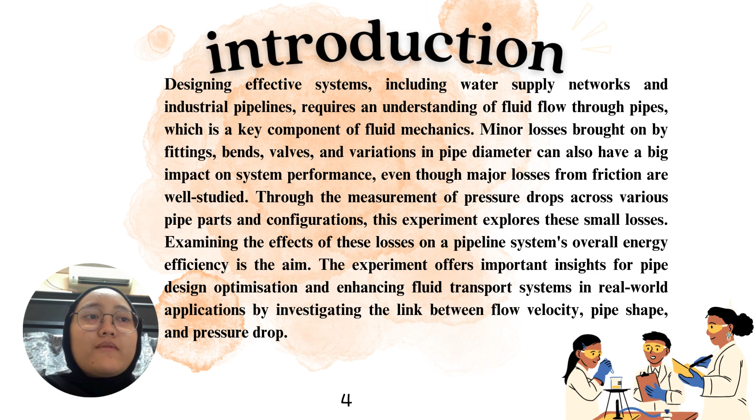Through the measurement of pressure drops across various pipe parts and configurations, this experiment explored these small losses. Examining the effects of these losses on the pipeline system's overall energy efficiency is the aim. The experiment offers important insights for pipe design optimization and enhancing fluid transport systems in real-world applications by investigating the link between flow velocity, pipe shape, and pressure drop.

Therefore, the objective of this experiment is to determine the loss coefficient KL value and minor head loss HLM in pipe components or fittings for different water flow rates, pipe diameters, and pipe bends.

The flow in the piping system at different flow rates may be required to pass through a variety of fittings, bends, or abrupt changes in area. Additional head loss called minor head loss is encountered primarily as a result of flow separation.

By simplifying the Bernoulli equation between 2 points of the horizontal pipe, Z1 and Z2, the pressure loss and the total head loss could be determined as follows.

So equation 1 is the Bernoulli equation, and since Z1 equals Z2, we simplify it. Equation 2 is the equation for the total losses, total head loss.

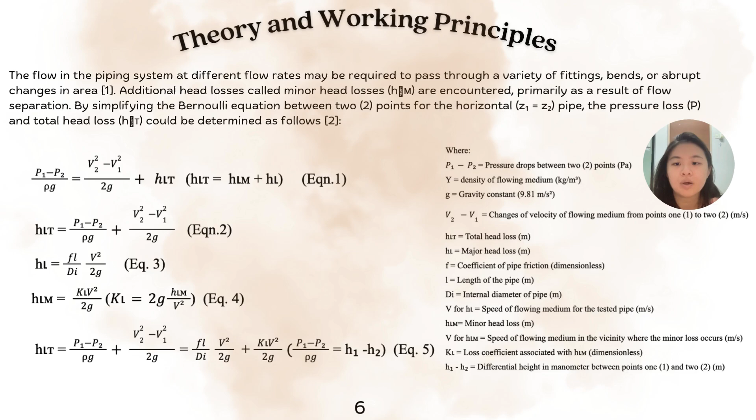Equation 3 is the head loss, equation 4 is the minor loss, and equation 5 is used to calculate the total loss, which combines equation 3 and 4 to get equation 5. So it depends on the equation.

Looking at equation 4, the value of minor losses is strongly dependent on the value of KL. How we determine the value of KL is strongly dependent on the geometry of the component.

In many practical applications, the Reynolds number is large enough so that the flow through the component is dominated by inertial effects, leaving the viscous effect as secondary importance in a flow dominated by inertial effects.

It is usually found that the pressure drop and head loss correlate directly with the dynamic pressure. Therefore, the friction factor for very large Reynolds number in fully developed pipe flow is independent of the Reynolds number.

The same condition is found to be true for flow through pipe components. Thus, in most practical cases, the KL for components is a function of geometry only.

In this experiment, the KL value and HLM in pipes for different water flow rates, pipe diameters, and pipe bends will be determined. The description related to each of the test geometries is as follows.

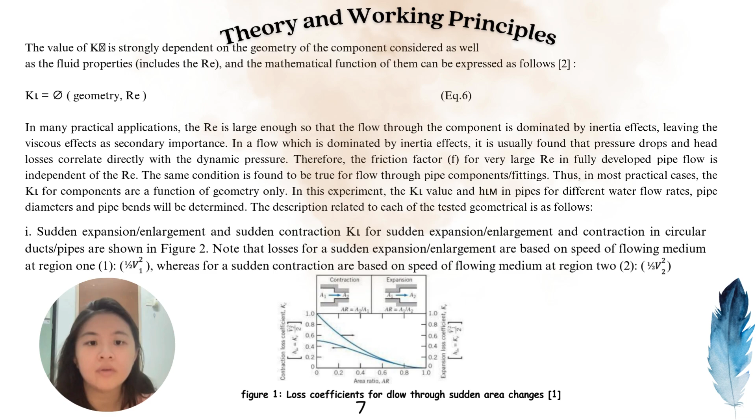Part 1 showing the sudden expansion and sudden contraction KL. You can refer to figure 1.

The value of KL for fluid flow through sudden enlargement and contraction can be obtained by considering the continuity equation 7, momentum equation 8, and energy equation between point 1 and 2.

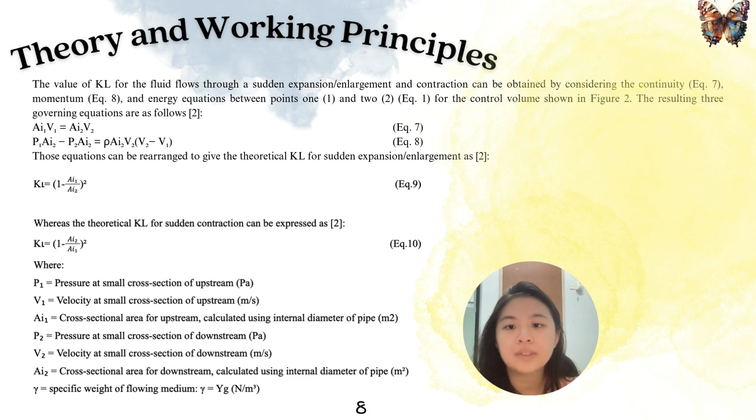Here are the resulting equations 7, 8, and 9. Basically, if we want to calculate the theoretical KL for sudden expansion and contraction, we are going to use equations 9 and 10.

For the second part, we have elbow, pipe bends, and pipe branch. For figure 2, we can directly refer to it to determine the typical value for

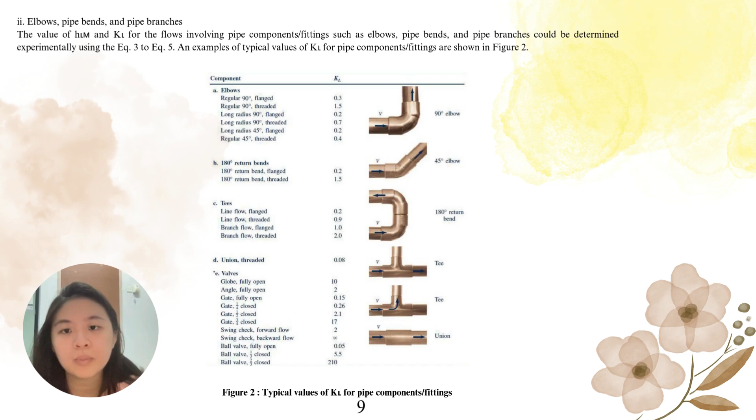KL for pipe components. What we use in this experiment is 90-degree bend, 90-degree angle elbow, and also 45-degree, and also T-type and Y-type branch. We can determine this using the diagram.

For the experiment setup, we have inlet valve, main switch, manometer tube, connected tube, and outlet valve. At the manometer tube, we have determined H1 and H2, and for the pipe selection, we have highlighted the parts of the sudden enlargement, sudden contraction, Y-type, T-type, angle 90 degree, bend 90 degree, and angle 45 degree.

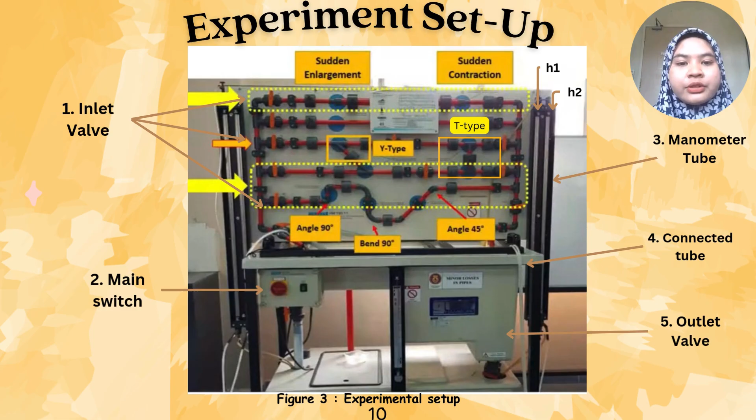For methodology, first the main switch and pump were turned on. Then valve V1 and V11 were fully opened in the pipe section for sudden enlargement and sudden contraction.

Then the control valve was slowly opened, turned counterclockwise to the maximum position, and we waited a while to remove any bubbles in the flowing pipe. Then the inlet flowing pressure H1 and outlet flowing pressure H2 were identified, and the manometer tube was connected.

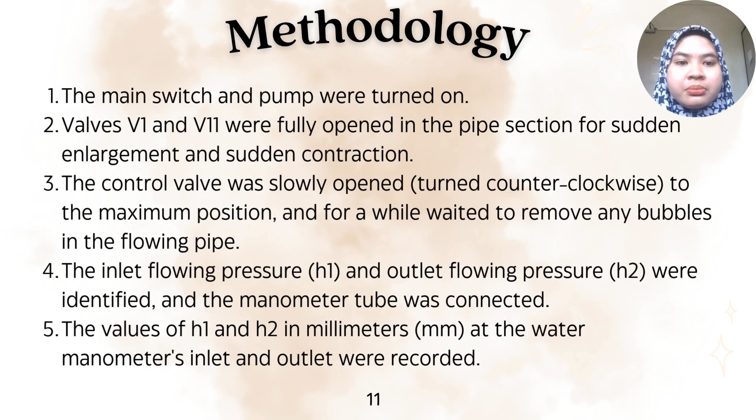The values of H1 and H2 in millimeters at the water manometer's inlet and outlet were recorded. Step 6: the knife valve was closed to collect 3 liters of water in the tank, and the time needed to measure the water flow rate Q was recorded.

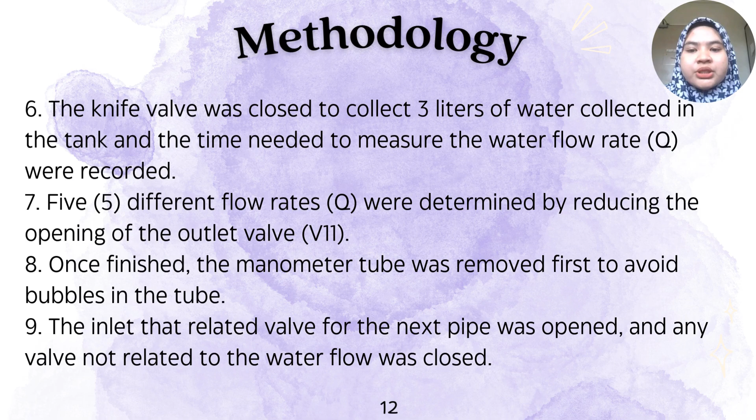Step 7: five different flow rates Q were determined by reducing the opening of the outlet valve, V11. Step 8: once finished, the manometer tube was removed first to avoid bubbles in the tube, then the inlet valve related to the next pipe was opened, and any valve not related to the water flow was closed. Next, steps 4 to 8 were repeated with the various tested components in the pipe section.

As shown in figure 3, for the Y-type we use V3, V8, V10, and V11. For the T-type, V3, V7, V10, and V11. And for the 90-degree angle, 90-degree bend, and 45-degree angle, we use V5 and V11.

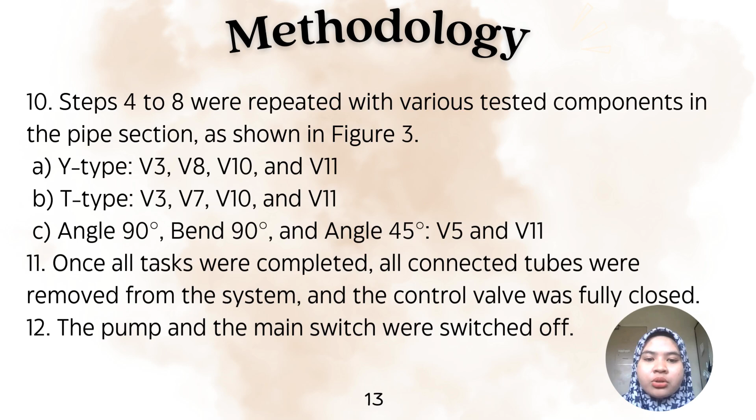Once all the tasks were completed, all connected tubes were removed from the system and the control valve was fully closed, and lastly the pump and the main switch were switched off.

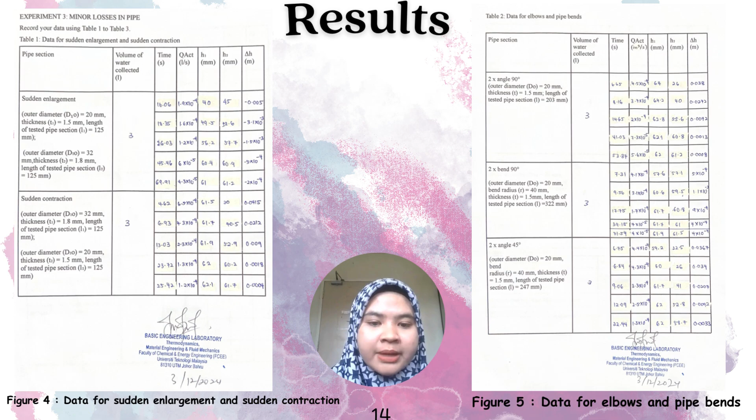Here is the result for the experiment on minor losses in pipes. Figure 4 shows the data for sudden enlargement and sudden contraction, and figure 5 shows the data for elbow and pipe bends. The next result, shown in figure 6, is the data for pipe branch.

For discussion part 1, we have calculated the minor head loss and KL value for each of the pipe components.

Before we start, we need to determine the viscosity first, using the temperature equal to 36, because we want to use the viscosity to calculate our Reynolds number in this experiment.

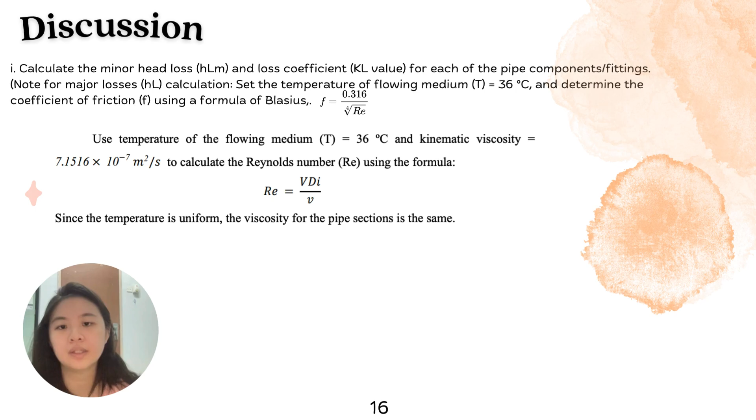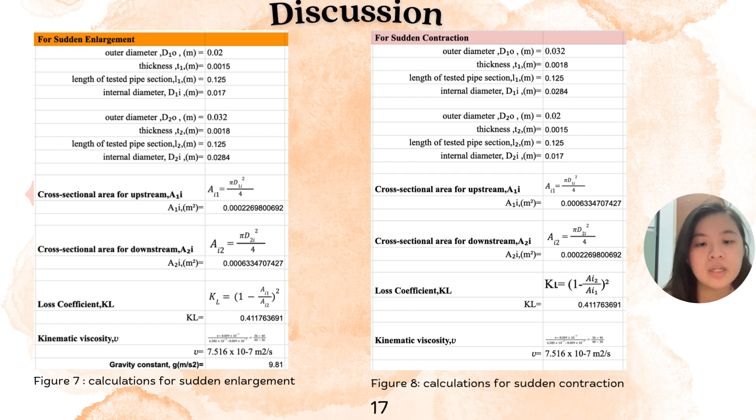In this case, the kinematic viscosity, just like the previous page, is still the same: 7.516, because the temperature is constant. Table 1 shows the data for sudden enlargement.

I have recorded this table, which consists of all the experimental values and the theoretical values we have calculated: Q, H1, H2, the differential pressure, the velocity, the Reynolds number, friction factor, the total head loss, the minor head loss and major head loss, and the KL value for theoretical and experimental.

We can observe that the velocity value at point 1 is larger than the velocity at point 2, because at point 2 the area becomes larger due to enlargement, so the velocity decreases. The value of H1 is always lower than H2, because the pressure at point 1 is lower than point 2, as the velocity at point 1 is higher than at point 2. All the flow rates in this experiment are turbulent flow.

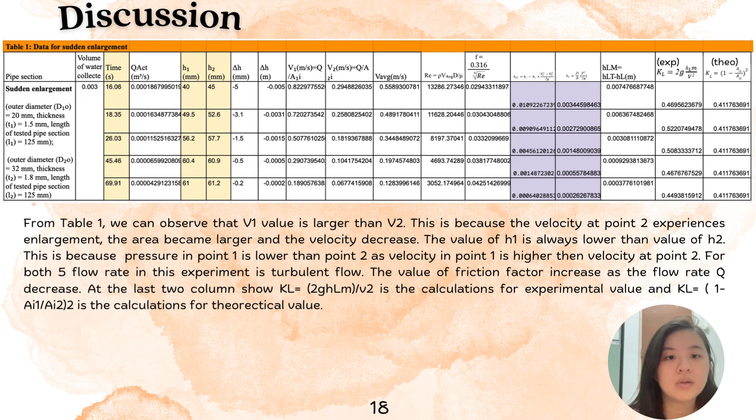We can see a phenomenon where the friction factor increases when Q decreases. For the last two columns, we calculated the KL value for experimental and theoretical using the formula. In table 2, there is the percentage error between theoretical and experimental.

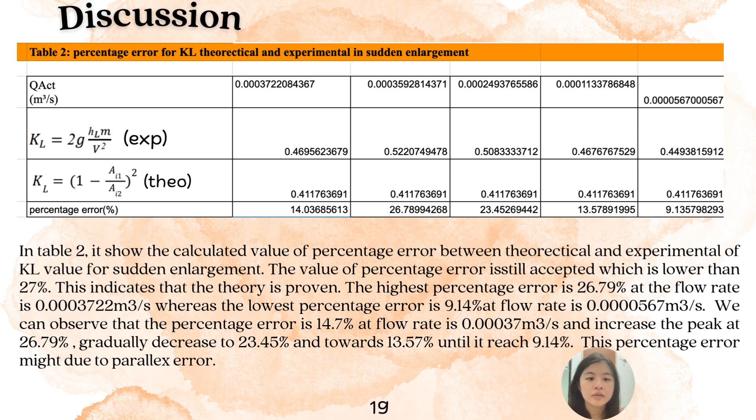The highest percentage error is 26.7 and the lowest is 9.14.

In table 3, we can observe that the velocity at point 1 is always lower than the velocity at point 2, because point 2 experiences contraction, so the area becomes smaller and the velocity increases. The H1 value is always higher than H2, because the pressure at point 1 is higher than at point 2.

Same as sudden enlargement, this sudden contraction undergoes turbulent flow since the Reynolds number is more than 3,000. The friction factor also increases when Q decreases. The last two columns show the calculated experimental KL value and the theoretical KL value.

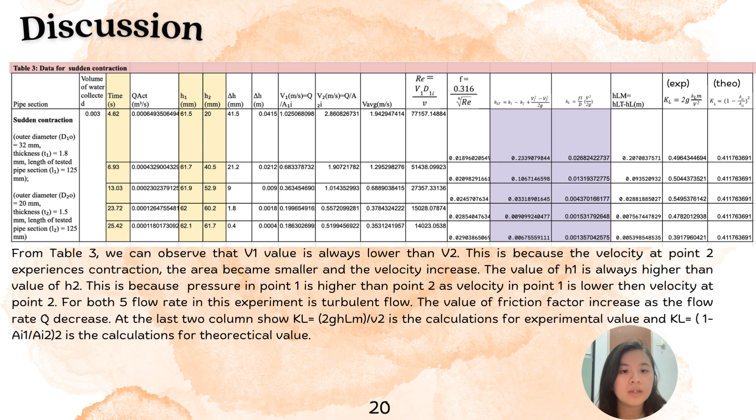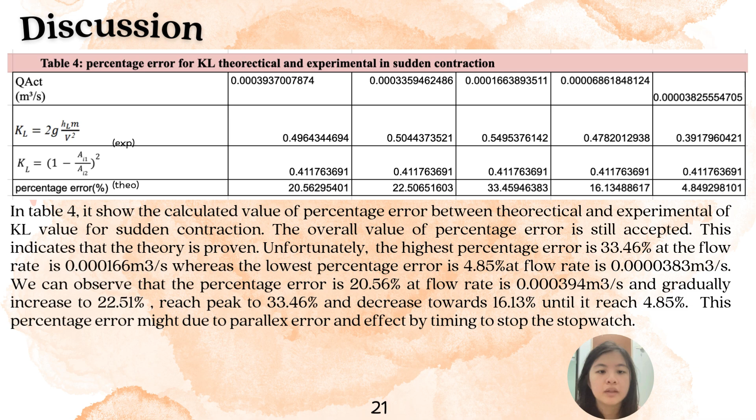For table 4, the percentage error for sudden contraction is quite high compared to sudden enlargement. The highest is 33.46% and the lowest is 4.85%.

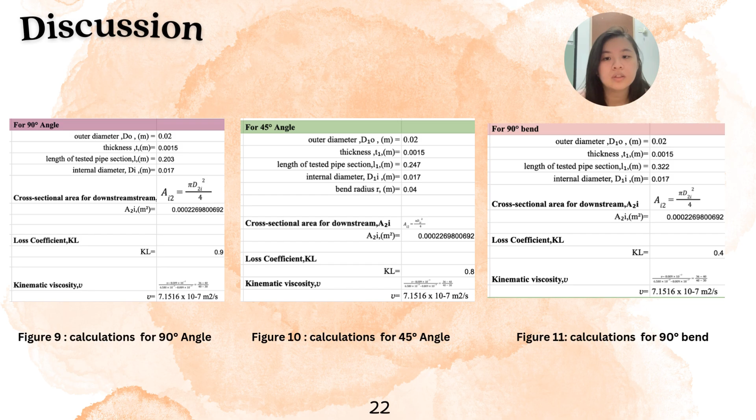This page shows the general calculation for the 90-degree angle, 45-degree angle, and 90-degree bend pipe. In figures 9, 10, and 11, we calculate the general internal diameter, the area, and the KL value determined using figure 2, along with the kinematic viscosity.

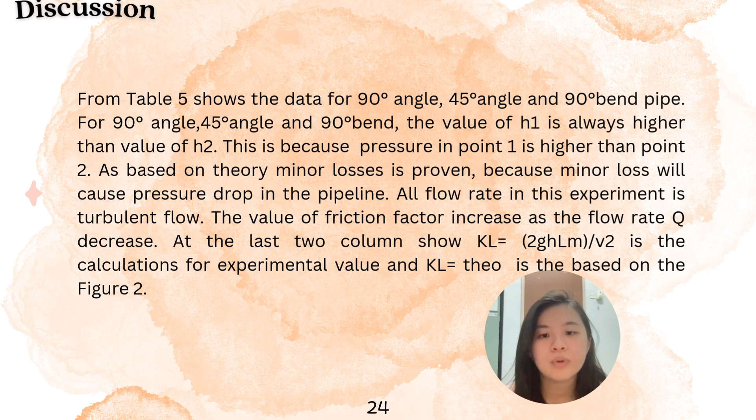So for the 90-degree angle, 45-degree angle, and also 90-degree bend, we can see that the value of H1 is always higher than H2. This trend is because minor losses occur at a bend, and the angle causes pressure drop in the pipeline. So the theory is proven as the value at point 2 is very low compared to H1. So all flow rate is still turbulent flow, and the friction factor is increasing when the flow rate is decreased. So for the last two columns, we're going to determine the KL value.

And also the percentage error. For the percentage error, we get a quite low percentage error in this case for the 90-degree angle. The highest is 7.89 and the lowest is 1.29.

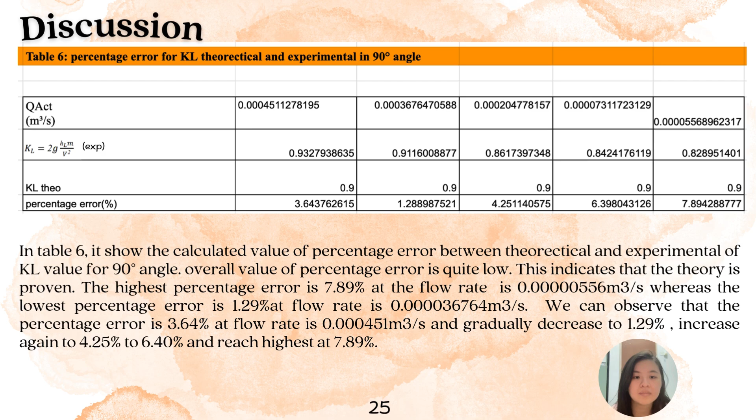Table 7 shows the percentage error for the 90-degree bend. So the 90-degree bend overall is quite high as the theoretical KL value is supposed to be 0.4, but we actually get around the range of 0.58 to 0.48 for the lowest KL experimental value. So the highest percentage error is 46.97 and the lowest percentage error is 22.

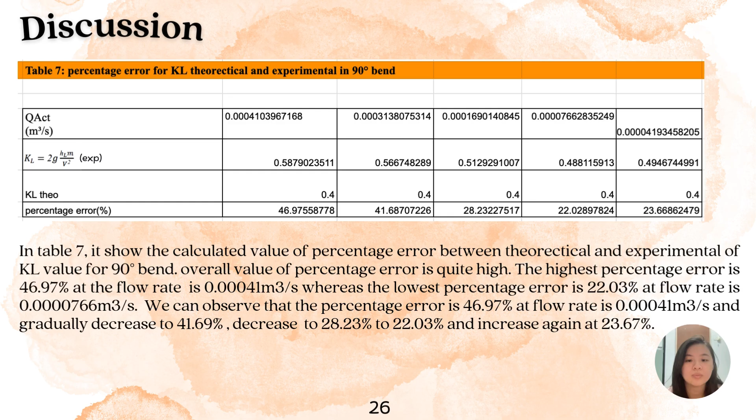Table 8 shows the percentage error between the KL value for 45-degree angle. So the percentage error is also quite low, with 1.3 as the lowest and 9.4 as the highest. And then the KL theoretical is 0.8 and the KL experimental range is between 0.76 and 0.87.

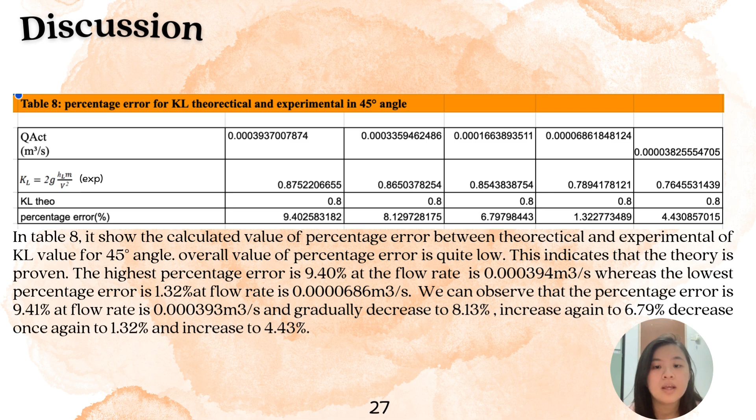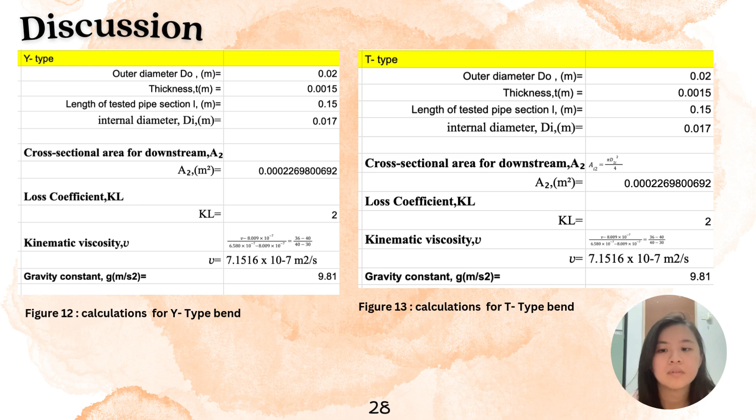In figure 12 and 13, also showing the Y-type and T-type calculation for the internal diameter, cross-sectional area, and the KL theoretical value, and also the kinematic viscosity, and the gravity constant.

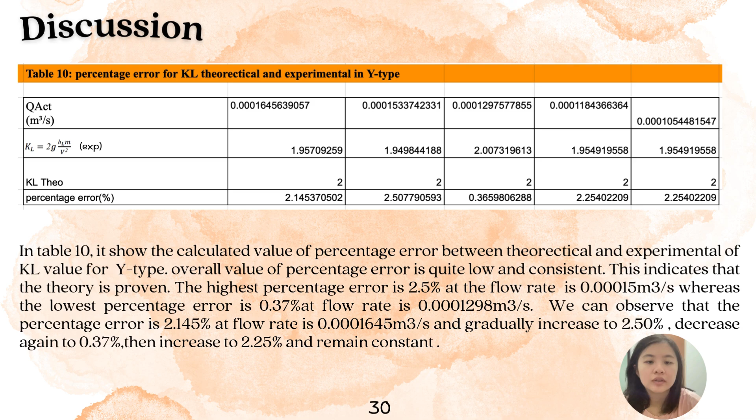For the KL value percentage error for Y-type, we can see that overall it is quite low. The lowest percentage is 0.36 and the highest is 2.5. And the KL value for the T-type, the percentage error is around 2.7 at the lowest and 14.39 at the highest.

For the next discussion, we discuss the effect of different water flow rates, pipe diameter, and pipe bends on the value of loss coefficient. The value of the loss coefficient K depends on factors such as water flow rate, pipe diameter, and the type of bends in the pipe.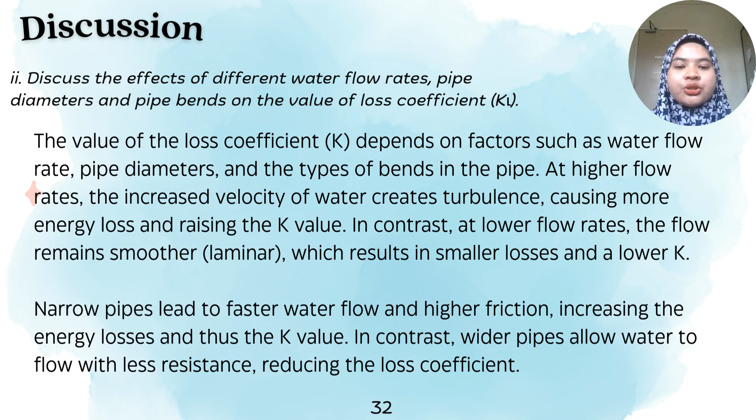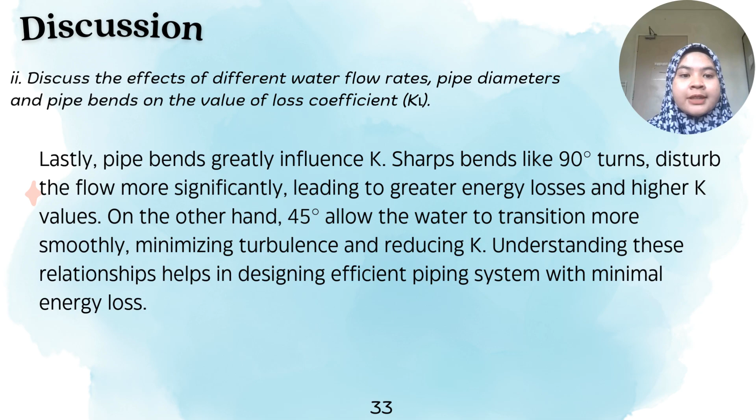In contrast, wider pipes allow water to flow with less resistance, reducing the loss coefficient. Lastly, pipe bends greatly influence the loss coefficient. Sharp bends like 90-degree turns disturb the flow more significantly, leading to greater energy losses and higher loss coefficient value. On the other hand, 45-degree bends allow the water to transition more smoothly, minimizing turbulence and reducing the loss coefficient. Understanding this relationship helps in designing efficient piping systems with minimal energy losses.

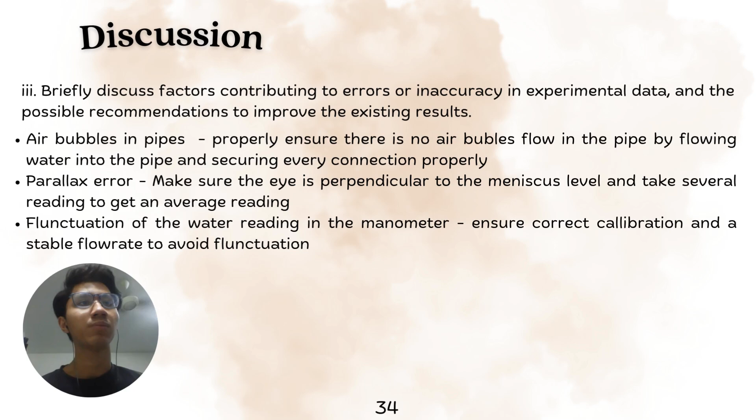For increasing experimental data accuracy, here are possible recommendations to improve the existing results. First, air bubbles in pipes: properly ensure there are no air bubbles in the pipe by flowing water into the pipe and securing every connection properly. Next, parallax error: make sure the eye is perpendicular to the meniscus level and take several readings to get an average. Next is the fluctuation of water reading in a manometer: ensure correct calibration and a stable flow rate to avoid fluctuation.

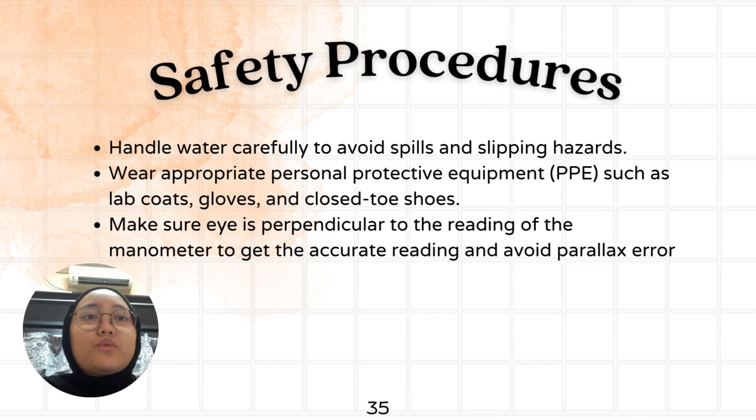Here are some of the safety procedures that should be conducted during the experiment. Number 1: we should handle water carefully to avoid spills and slipping hazards. Number 2: we should wear appropriate personal protective equipment, PPE, such as lab coats, gloves, and closed-toe shoes. And lastly, we have to make sure the eye is perpendicular to the reading of the manometer to get accurate reading and avoid parallax error.

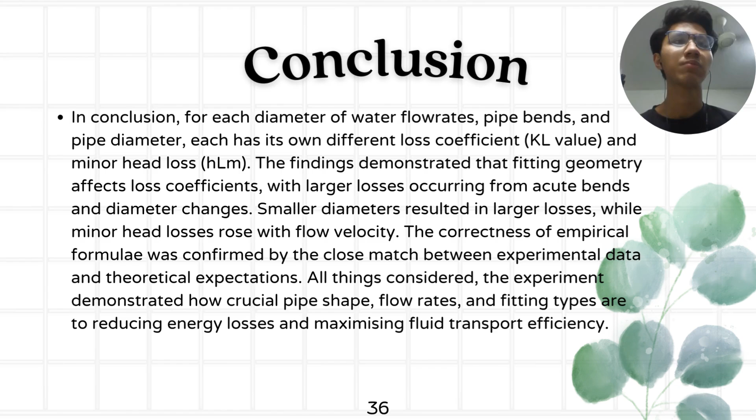In conclusion, for each diameter, water flow rate, pipe bends, and pipe diameter each have its own different loss coefficient and minor head loss. The findings demonstrate that fitting geometry affects loss coefficient, with larger losses occurring from acute bends and diameter changes. Smaller diameter results in larger losses, while minor head losses rose with flow velocity. The correctness of the empirical formula was confirmed by a close match between experimental data and theoretical expectations. All things considered, the experiment underscores that pipe shape, flow rates, and fitting types are crucial to reducing energy losses and maximizing fluid transport efficiency.